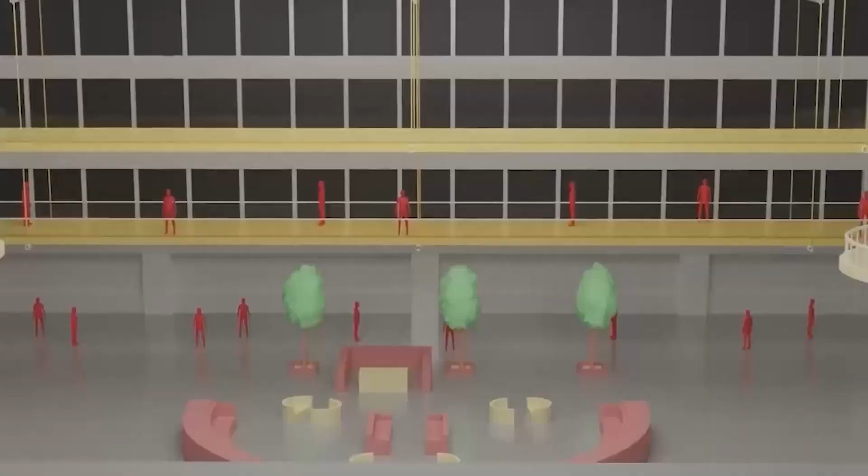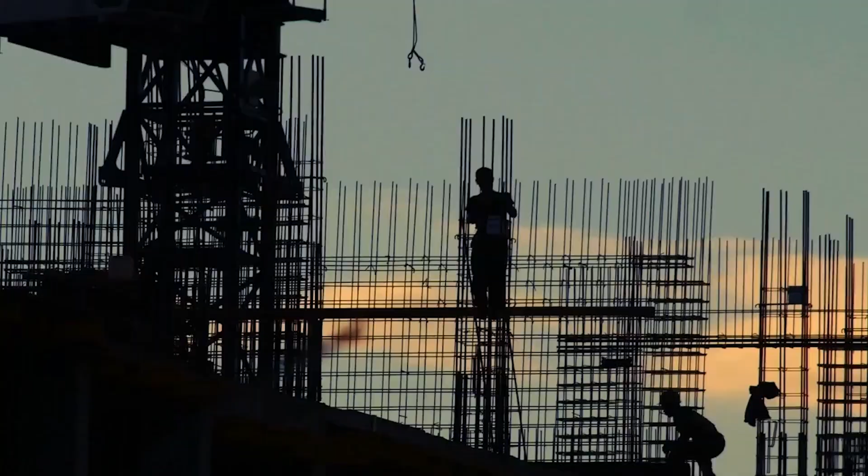As the sun set on July 17, 1981, hundreds of people gathered in the hotel's expansive atrium for a tea dance, a popular social event that had become a weekly tradition. The atmosphere was festive, with couples swaying to the music and laughter echoing through the cavernous space. Little did they know that above them, a fatal flaw in the building's design was about to unleash a tragedy of unimaginable proportions. To understand the events that unfolded that fateful night, we must first turn back the clock and examine the conception and construction of this ill-fated structure. The birth of a modern marvel.

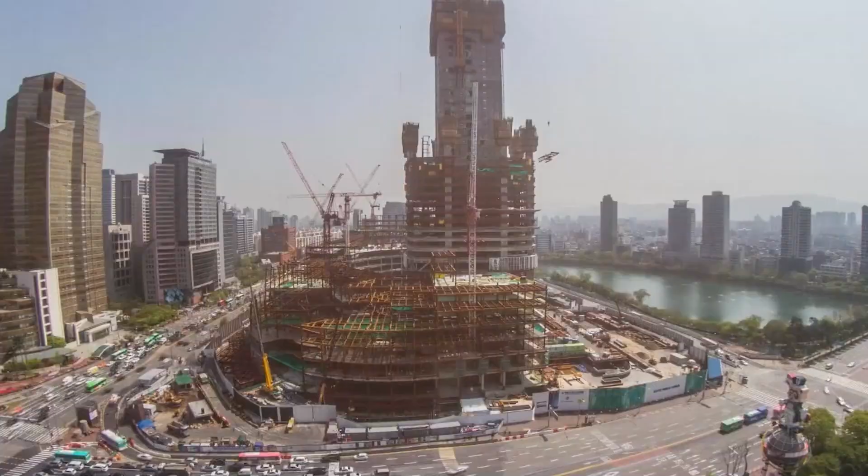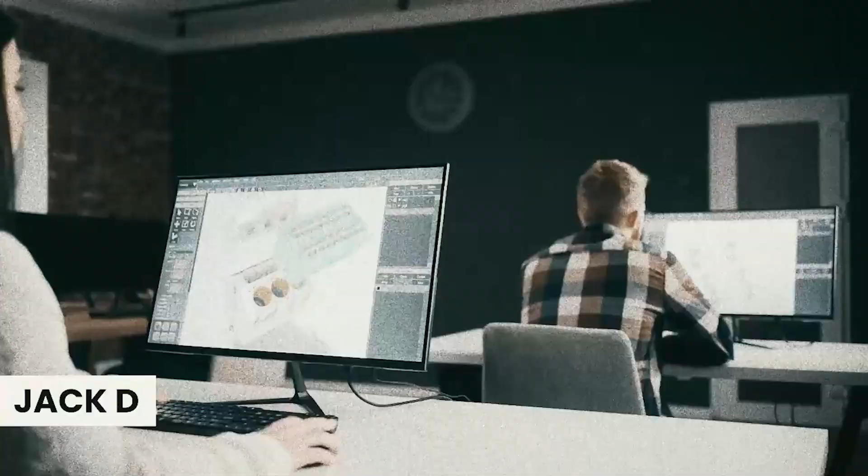In the late 1970s, Kansas City was experiencing a period of growth and urban renewal. The city's leaders and developers were eager to create a landmark that would showcase the city's aspirations and attract visitors from far and wide. Enter the Hyatt Regency Hotel, a project that promised to be a crown jewel in the city's skyline. Groundbreaking for the hotel took place in 1978, and construction proceeded at a rapid pace. The design of the hotel was entrusted to Jack D. Gillum and Associates, a local structural engineering firm working in collaboration with PBNDML Architects, Planners, Inc. The general contractor for the project was Eldridge Construction Company.

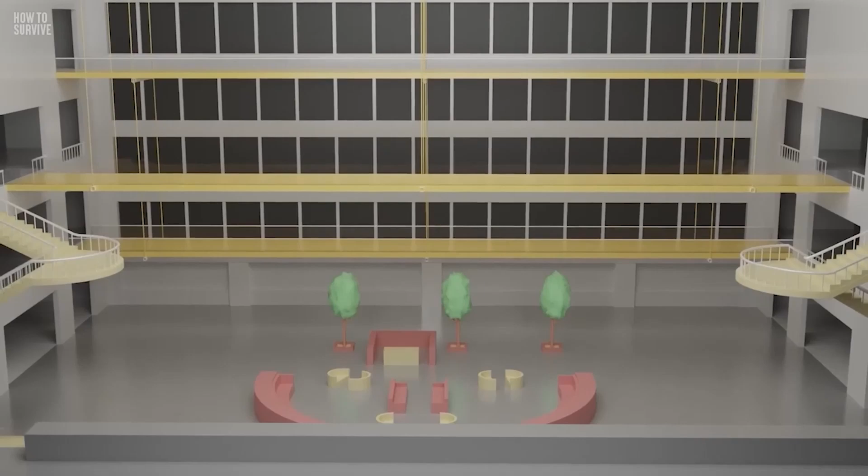The hotel's most striking feature was to be its soaring atrium, a vast open space that stretched from the ground floor to the roof, some 50 meters high. This atrium was to be crossed by 3 walkways, suspended from the ceiling at the 2nd, 3rd, and 4th floor levels. These skywalks were not merely functional passages, but were designed to be architectural showpieces, offering guests dramatic views of the atrium below and serving as observation platforms during events.

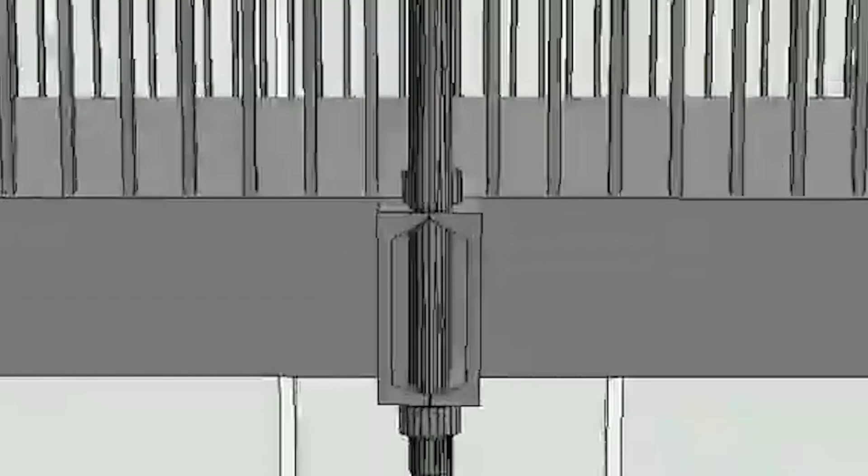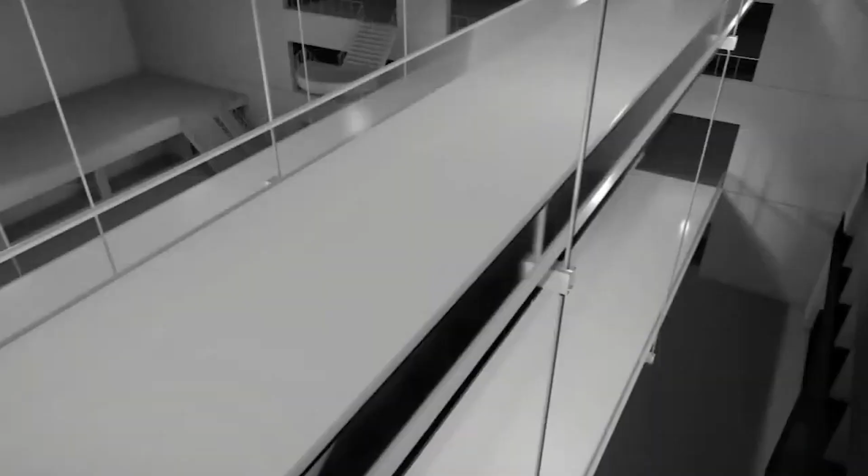The original design called for the 3 walkways to be suspended from the roof by a series of steel rods. The 4th floor walkway was to be directly connected to these rods, while the 2nd floor walkway would hang from the 4th floor walkway using a separate set of rods. The 3rd floor walkway was to be cantilevered from the hotel's exterior wall. This design was ambitious and visually striking. The walkways, each 37 meters long and weighing approximately 29,000 kilograms, would appear to float in the air, adding to the sense of grandeur and open space that the atrium was meant to convey. The 4th floor walkway was positioned directly above the 2nd floor walkway, offset by just a few meters to create a staggered effect. Construction challenges and design changes.

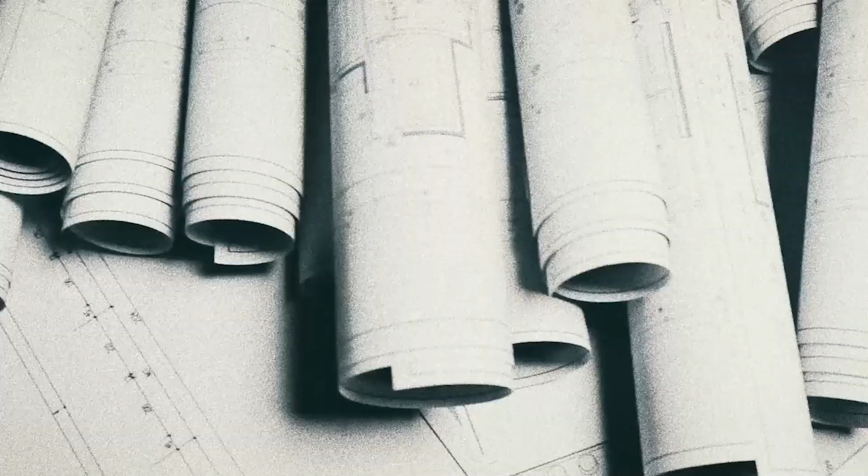As construction progressed, however, challenges began to emerge. The original design proved difficult to implement, and changes were proposed. In a fateful decision, the engineers altered the support system for the walkways. Instead of suspending both the 4th and 2nd floor walkways from the roof, they opted to hang the 2nd floor walkway directly from the 4th floor walkway. This change, which seemed minor at the time, would prove to be catastrophic.

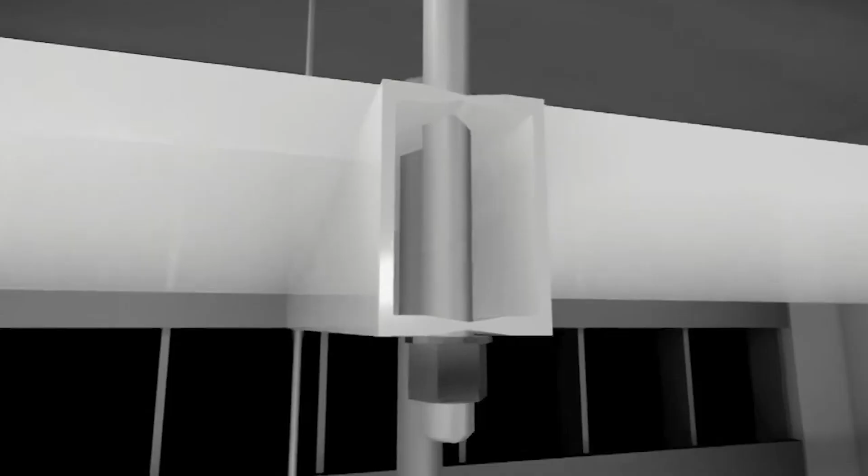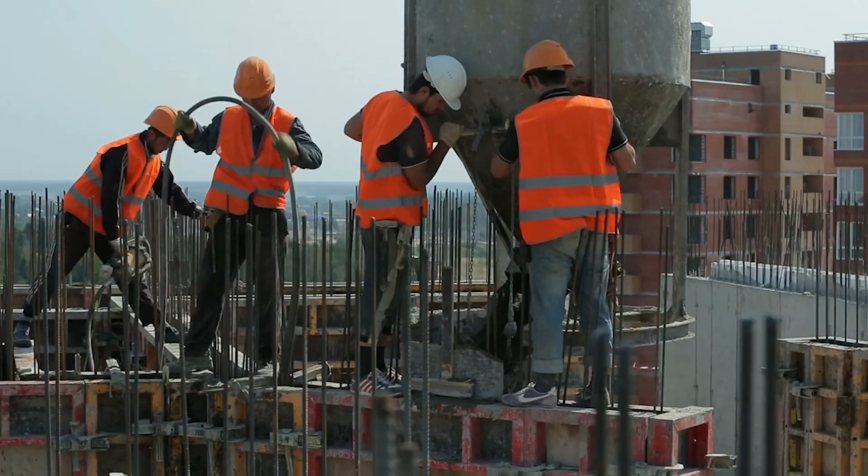The new design effectively doubled the load on the connections between the 4th floor walkway and the support rods. What's more, the box beams that made up the walkways were now required to support far more weight than originally intended. Despite these significant alterations, the changes were not subjected to rigorous reanalysis or testing. The project moved forward, with construction crews working to bring the architects' and engineers' vision to life. As the walkways took shape, suspended high above the atrium floor, few could have imagined the disaster that lay in wait.

The hotel opened its doors in July 1980, to much fanfare. Its striking design and luxurious amenities quickly made it a popular destination for both tourists and locals. The atrium, with its suspended walkways, became a particular point of pride, often featured in the hotel's promotional materials. For a year, the hotel operated without incident. Thousands of guests walked across the skywalks, marveling at the views and the innovative design.

The weekly tea dances in the atrium became a staple of Kansas City's social scene, drawing crowds of people to dance and socialize beneath the suspended walkways. But beneath the surface, the fatal flaw in the walkway's design was silently waiting to reveal itself.

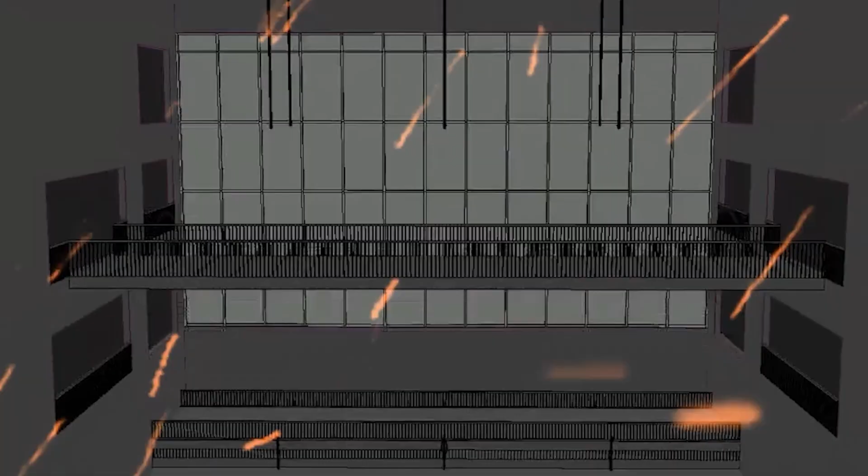The night of July 17, 1981. As evening fell on July 17, 1981, the Hyatt Regency's atrium began to fill with people. It was a Friday, and the hotel was hosting its regular tea dance. By 7 p.m., an estimated 1,600 people had gathered in the atrium and on the suspended walkways.

The scene was one of joy and celebration. The orchestra played, couples danced, and onlookers watched from the walkways above. The second and fourth floor walkways were particularly crowded, with people leaning against the railings to observe the festivities below.

At approximately 7:05 p.m., witnesses reported hearing a loud crack, like the sound of a gunshot. For a brief moment, time seemed to stand still as the revelers tried to process what they had heard. Then, with a horrifying groan of twisting metal, the unthinkable began to unfold.

The fourth floor walkway suddenly gave way, its connections to the support rods failing catastrophically under the weight of the people on the walkway and the second floor walkway hanging below it. As it fell, it crashed into the second floor walkway, which was unable to withstand the impact. Both walkways then plummeted to the atrium floor, bringing with them a rain of steel, concrete, and human bodies.

The collapse occurred in a matter of seconds, but for those present, it must have felt like an eternity. The sound of screaming and tearing metal filled the air as the walkways crashed down, crushing those on the dance floor below. Dust and debris billowed through the atrium, obscuring the horrific scene.

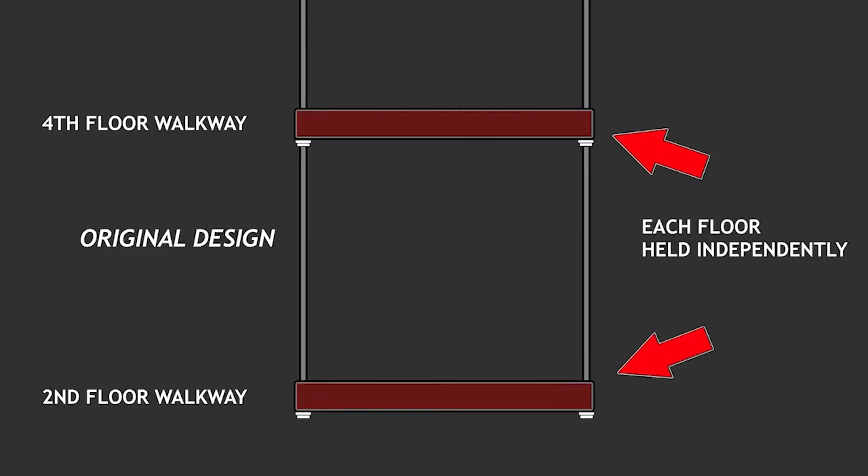The root cause of the collapse was traced back to the change in the walkway's support structure that had been made during construction. The original design called for the fourth-floor walkway to be suspended from the ceiling by a set of steel rods, with the second-floor walkway hanging from the same rods. This would have distributed the load between the two walkways. However, the design was changed so that the second-floor walkway was instead suspended from the fourth-floor walkway. This seemingly minor alteration had catastrophic consequences.

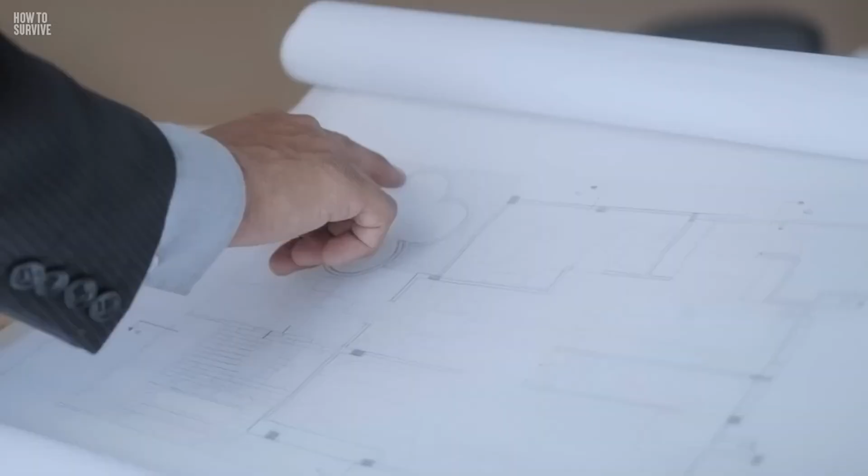It effectively doubled the load on the fourth-floor walkway's connections, as they now had to support both walkways instead of just one. The box beams that made up the walkway were simply not strong enough to handle this increased load. The investigation revealed that even if the walkways had been built exactly as originally designed, they would have only supported 60% of the minimum load required by Kansas City's building code. With the changes made during construction, this capacity was reduced to a mere 30% of the mandated minimum.

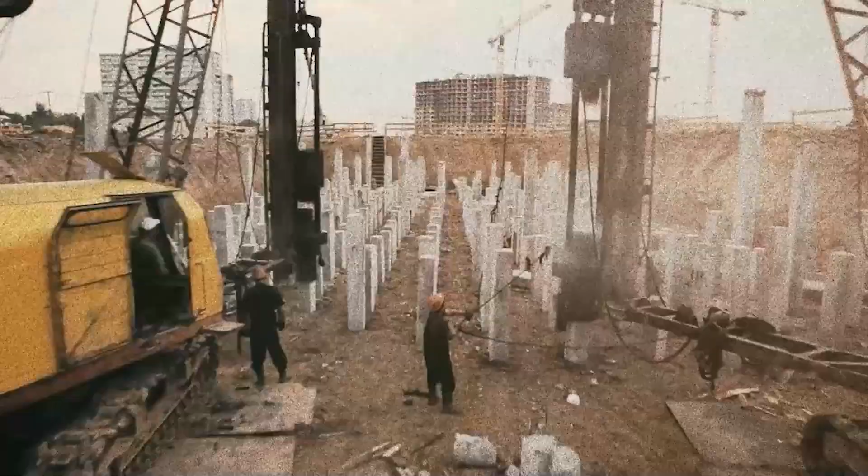The failure of oversight. As shocking as the design flaws were, equally disturbing was the failure of the various checks and balances that should have caught these errors before they led to disaster. The investigation uncovered a series of missed opportunities and lapses in judgment that allowed the flawed design to move forward unchallenged. The structural engineers, Jack D. Gillum and Associates, had approved the change in the walkway design without performing the necessary calculations to ensure its safety. They had relied on the steel fabricator, Havens Steel Company, to finalize the connection details. Havens, in turn, had made their own changes to simplify the construction process, further weakening the structure.

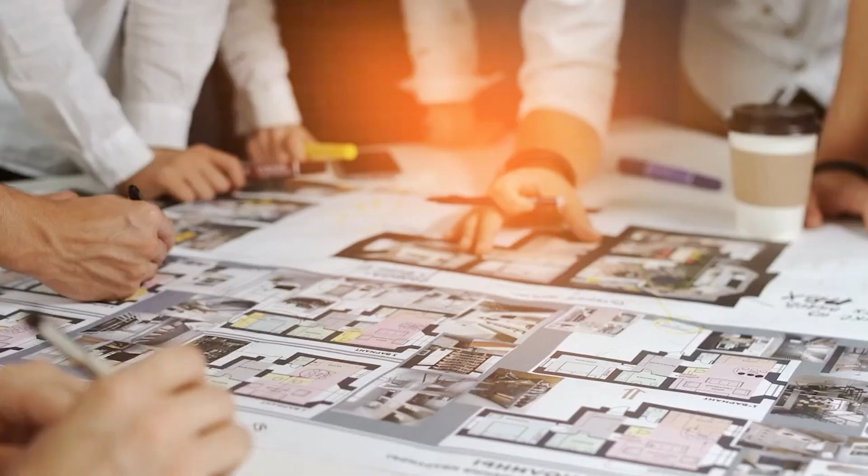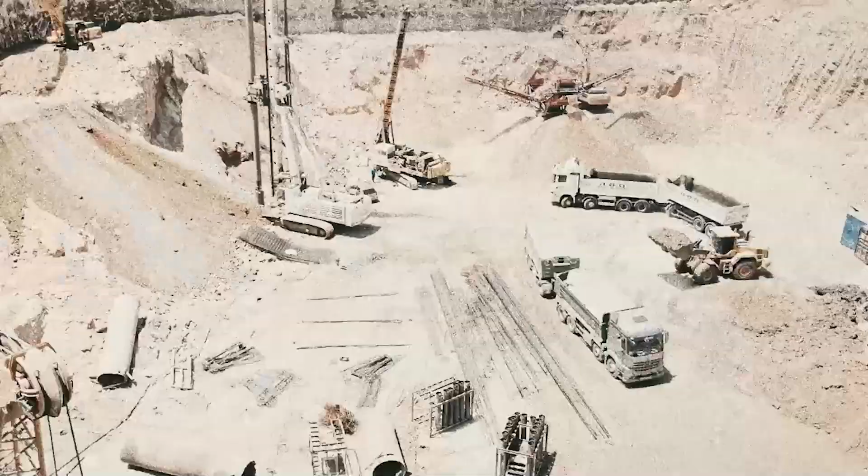Perhaps most alarmingly, the hotel had opened and operated for a full year with these fatal flaws in place. Regular inspections and reviews had failed to identify the problem, and warning signs, such as the walkways swaying noticeably when in use, were either ignored or not reported to the appropriate authorities. The Hyatt Regency disaster forever changed the landscape of engineering and construction. Its echoes can be heard in every structural inspection, every peer review, every ethics class in engineering schools across the country. It's a tragedy that should never have happened, but in its aftermath, it has undoubtedly saved countless lives by fundamentally reshaping how we approach the built environment.

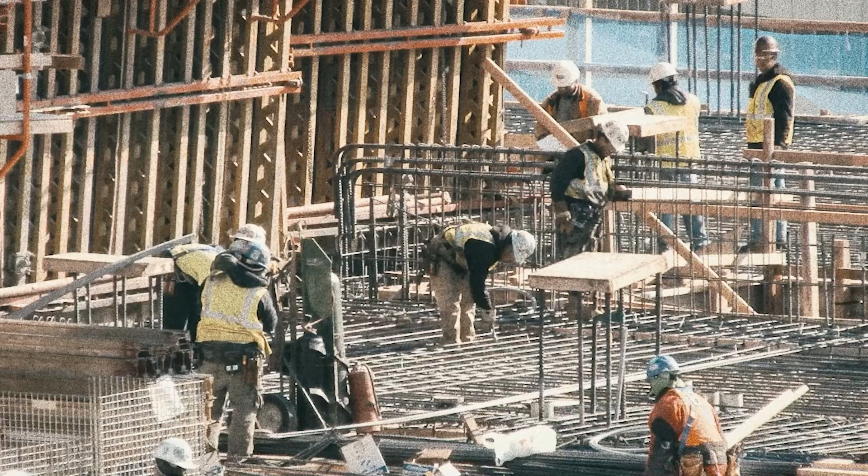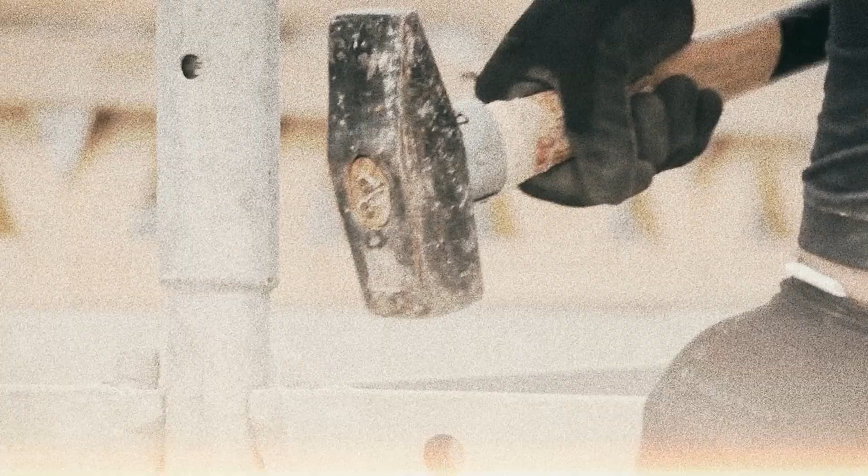As we remember the victims and honor the survivors of that terrible night in July 1981, we also look forward with the knowledge that their legacy lives on in every safely constructed building, in every rigorous design review, in every conscientious decision made by engineers and architects around the world. In this way, out of unimaginable tragedy, some measure of lasting good has emerged, a fitting, if insufficient, tribute to those whose lives were cut short on that summer evening in Kansas City.

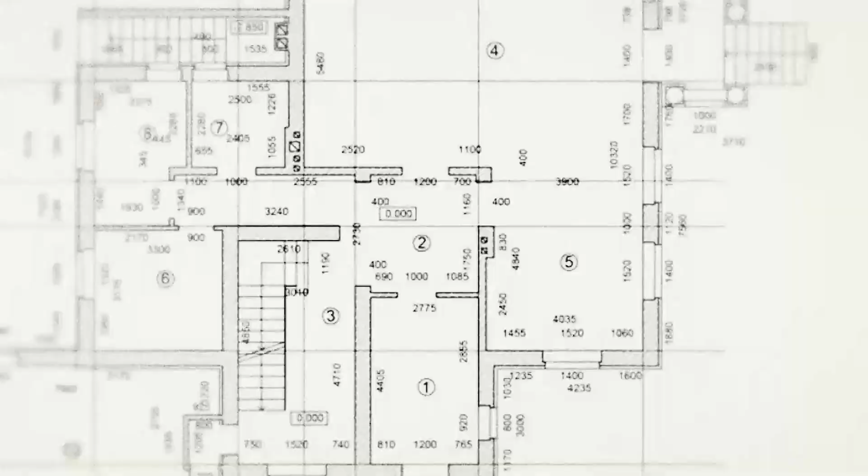The story of the Hyatt Regency collapse will continue to be told, studied, and reflected upon for generations to come. It stands as a solemn reminder of the consequences of failure, but also as an inspiring testament to our capacity to learn, to improve, and to strive always for the highest standards of safety and integrity in our built environment. In the final analysis, it is a story not just of collapse, but of the strength and resilience of the human spirit in the face of adversity.